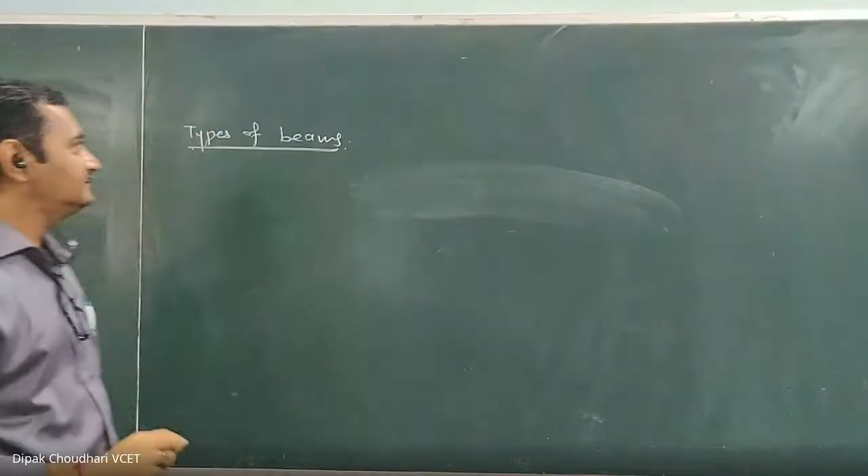Is it visible? Shreyas, unmute yourself and tell me. Okay, yes, it is visible. The first one is the types of beam. Then next important instructions to all of you.

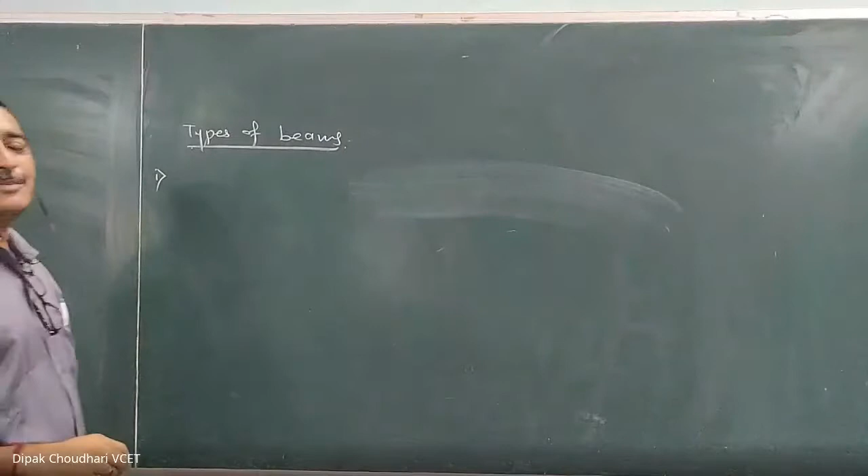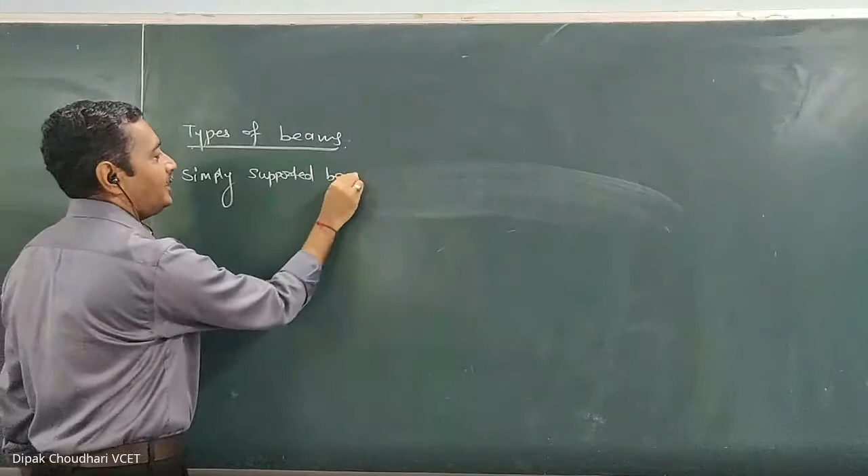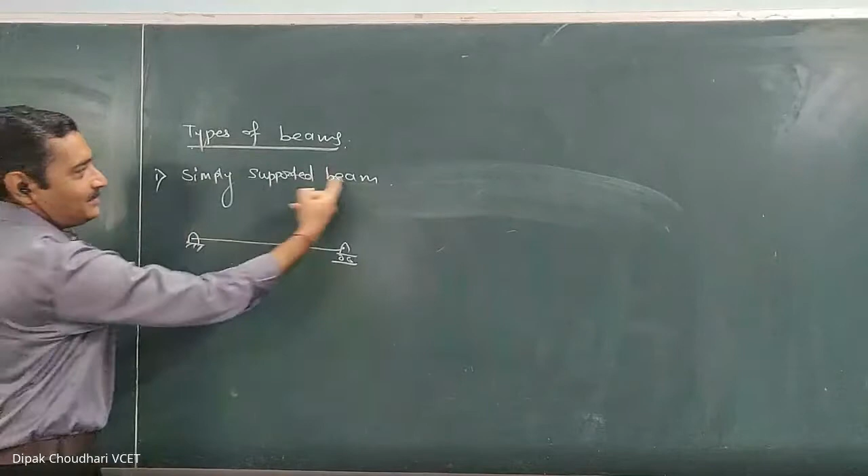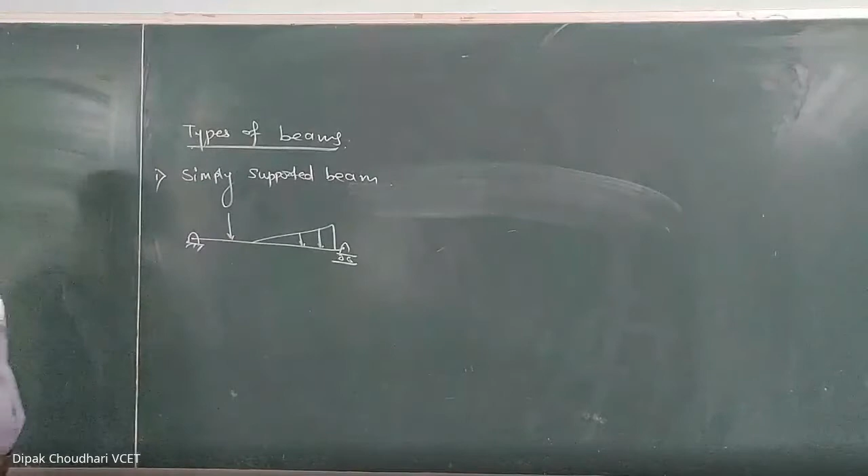Okay, so let's start with the types of beam. You have studied the types of beam in the first year. The first type of beam is the simply supported beam. A simply supported beam is supported at its two extreme ends with different types of supports. So when the beam is supported at its two extreme ends, such type of beam is known as a simply supported beam. The load may be anything, a point load or a UVL, but when the beam is supported at its two extreme ends, it is called a simply supported beam. I hope all of you know how to calculate the support reactions for the simply supported beam.

The second type of beam is the cantilever beam.

Cantilever beam. What is the cantilever beam? If the beam is supported at one end and the other end is free, such type of beam is known as a cantilever beam. And whenever we have the cantilever beam, we have to restrict all three types of motion.

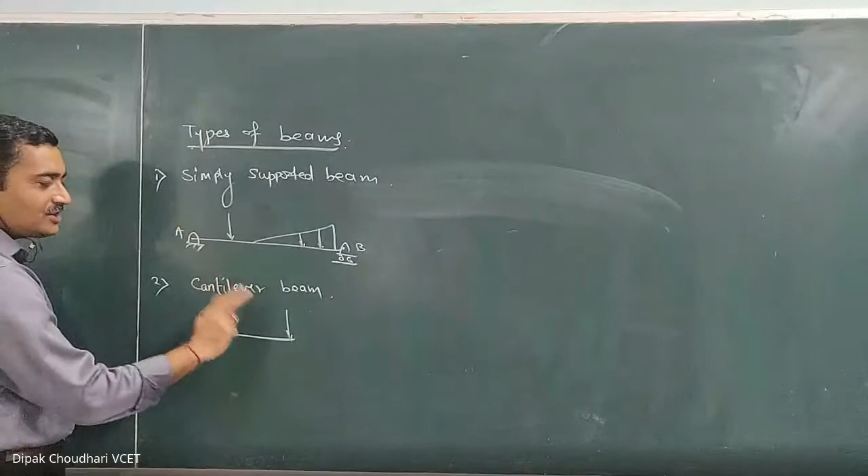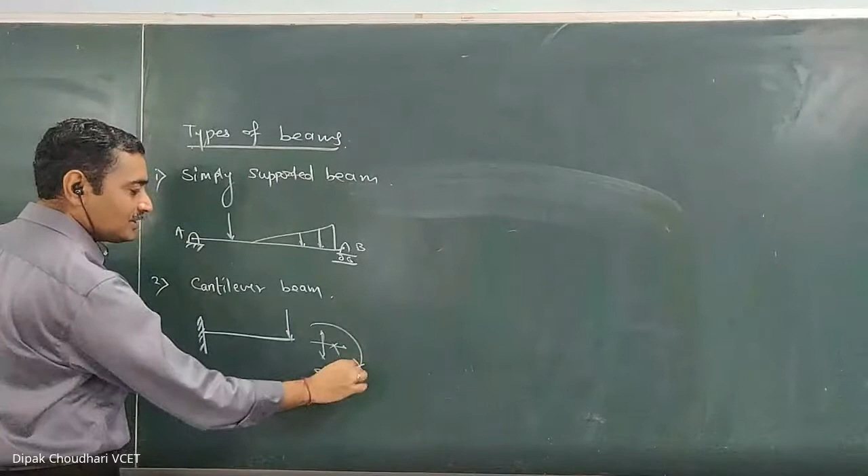There should not be any vertical linear motion, there should not be any horizontal linear motion, and we also have to restrict the rotational motion. To restrict all these three types of motion, the support required for the cantilever beam is the fixed support. That's why for a cantilever beam, the support is always a fixed support.

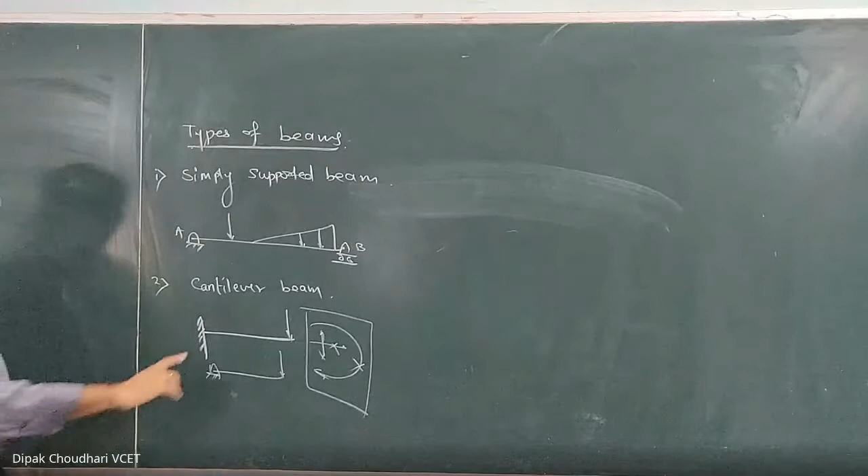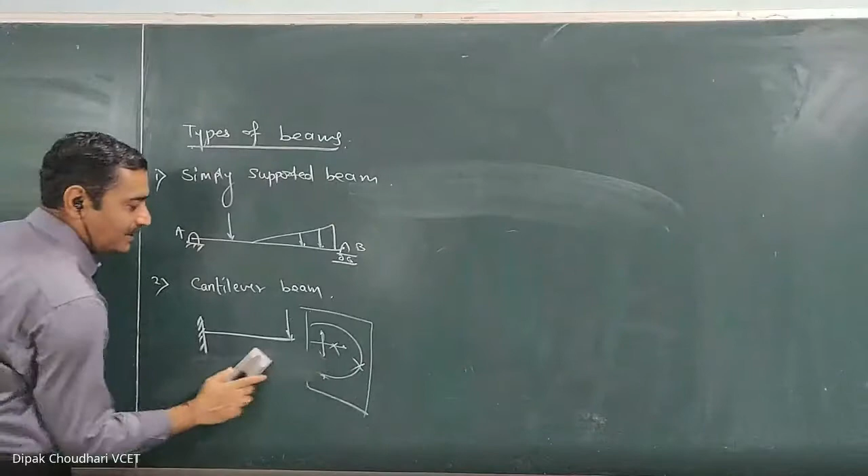In a cantilever beam, if at one end we use a hinge support instead and apply the load, the significance of the hinge support is that it cannot restrict the rotational motion; at the hinge support, rotational motion is allowed. So since rotational motion is allowed, if we use a hinge support instead of a fixed support, it can't remain in equilibrium and will fall down. That's why in a cantilever beam, which is supported at one end with the other end free, the support is always a fixed support.

I'm coming to the types of support also, after covering the types of beam. The third type of beam is the continuous beam.

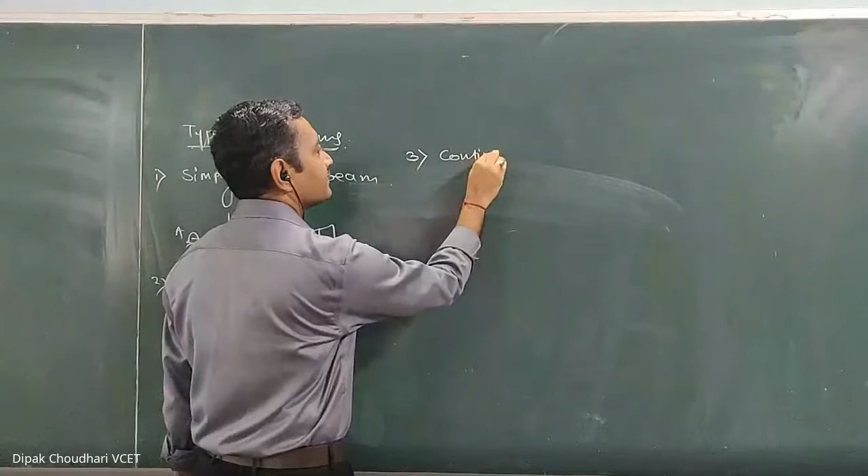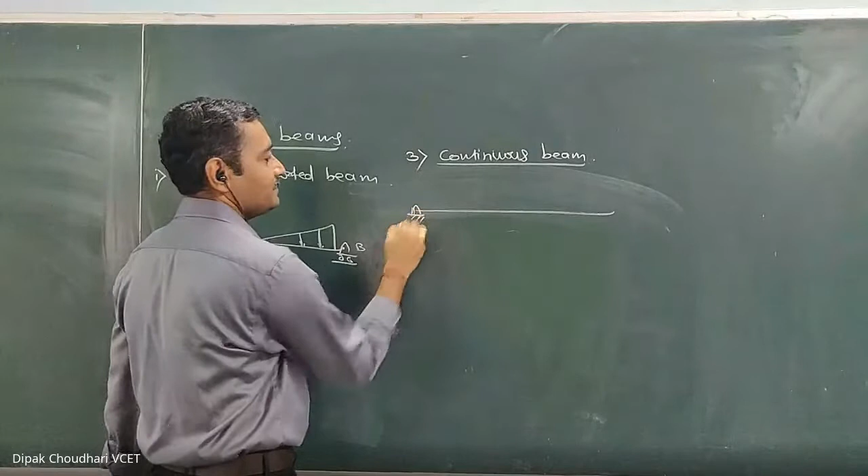Now, what is a continuous beam? When the beam is supported by more than two supports - here suppose this is one support, this is another support, this is a third support - then such a beam is known as a continuous beam.

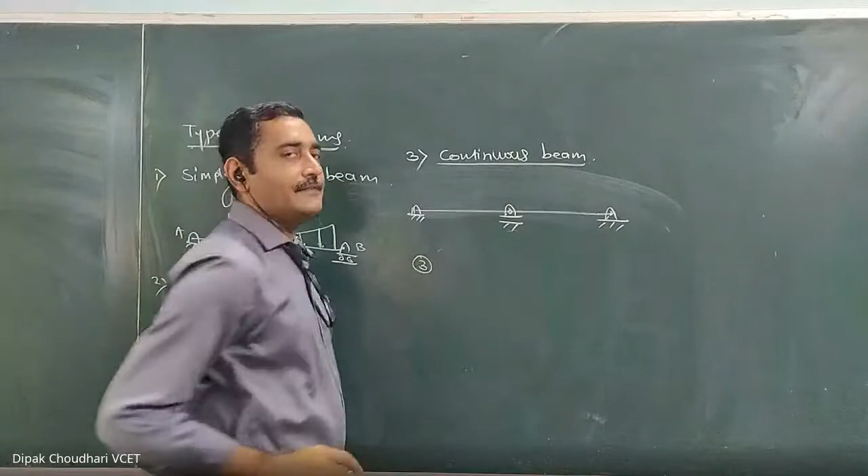We know that when we consider any beam, we consider it to be in equilibrium, and by applying the conditions of equilibrium, we calculate the support reactions. We have only three conditions of equilibrium, and by using these three conditions for any beam or structure in equilibrium, we can get only three equations, and by using three equations, we can calculate only three unknowns.

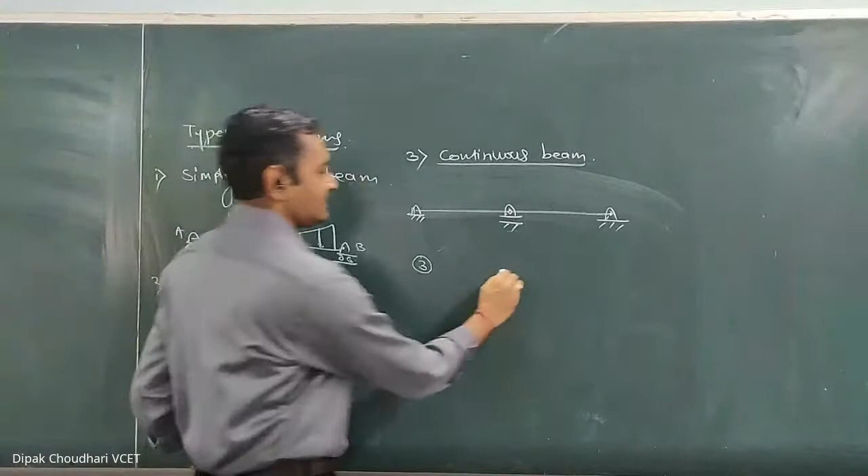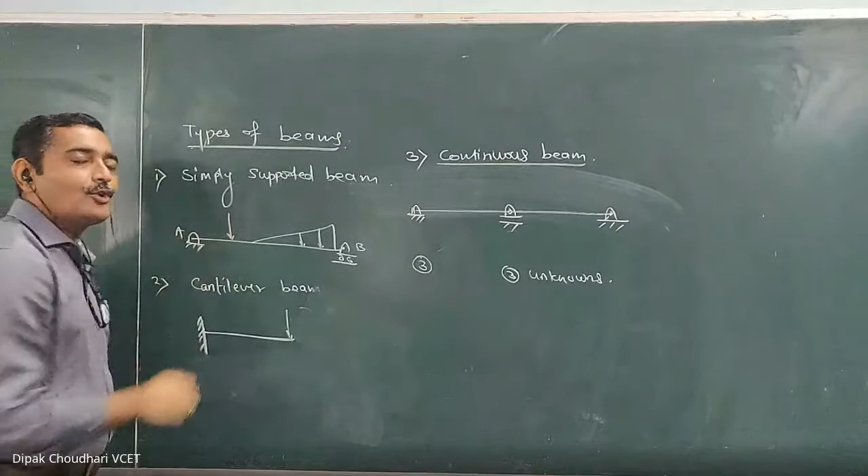Now, consider this simply supported beam. At A there is a hinge support, which has two components of reaction, meaning two unknowns. At the roller support there is only one component of reaction, so only one unknown. Altogether there are three unknowns, and using the three conditions of equilibrium we can calculate them.

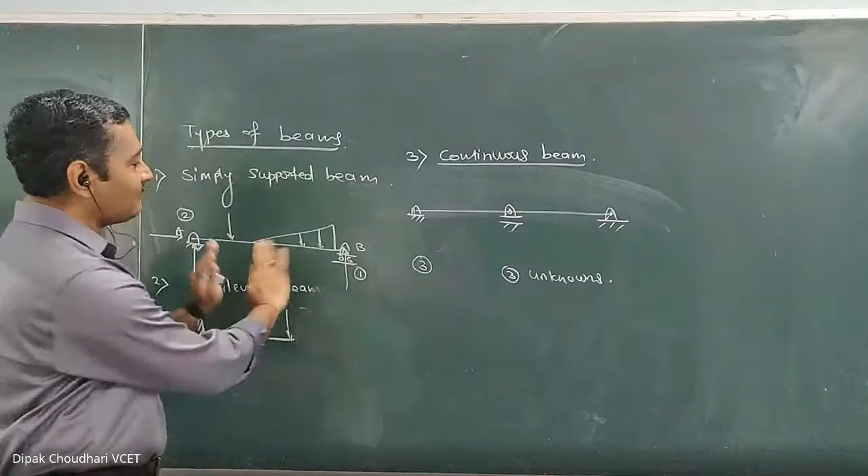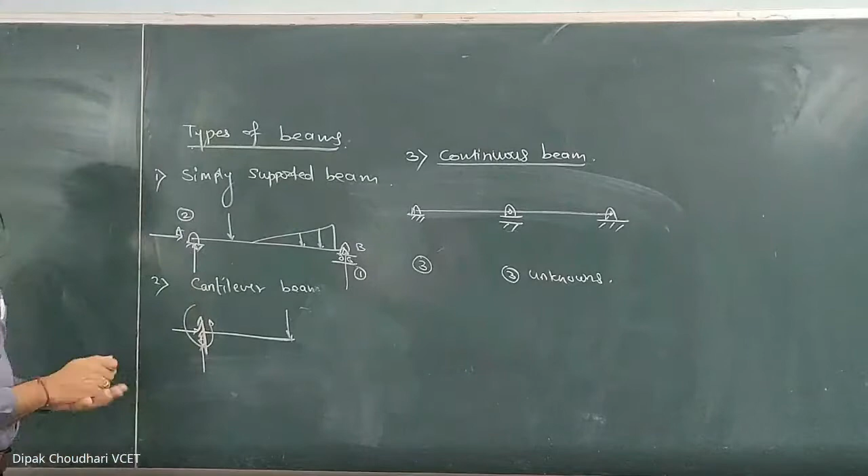Whereas in a cantilever beam there is a fixed support. At the fixed support, horizontal motion, vertical motion, and rotary motion are all restricted. To restrict horizontal motion there's a horizontal component of reactive force, to restrict vertical motion there's a vertical component of reactive force, and to restrict rotational motion there's a reactive moment. So at the fixed support there are three unknowns, and for the cantilever beam, using the three conditions of equilibrium, we can calculate all three unknowns.

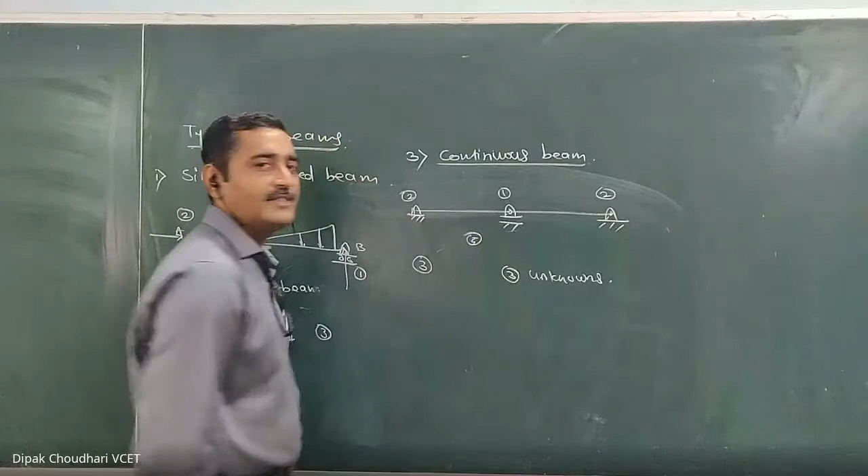But in a continuous beam, since there are more than two supports - suppose this is a hinge, this is a roller, and this is also a hinge - here there are two unknowns, here one unknown, and here again two unknowns. Altogether there are five unknowns, and to calculate five unknowns we require five equations. So how can we get the five equations?

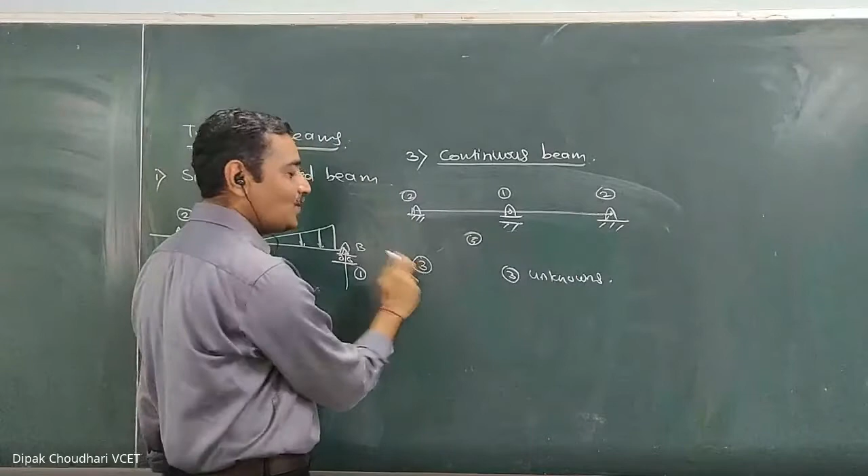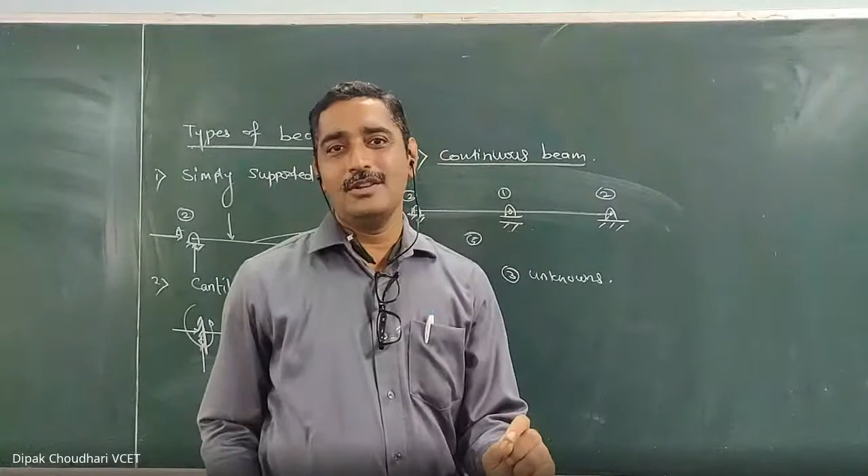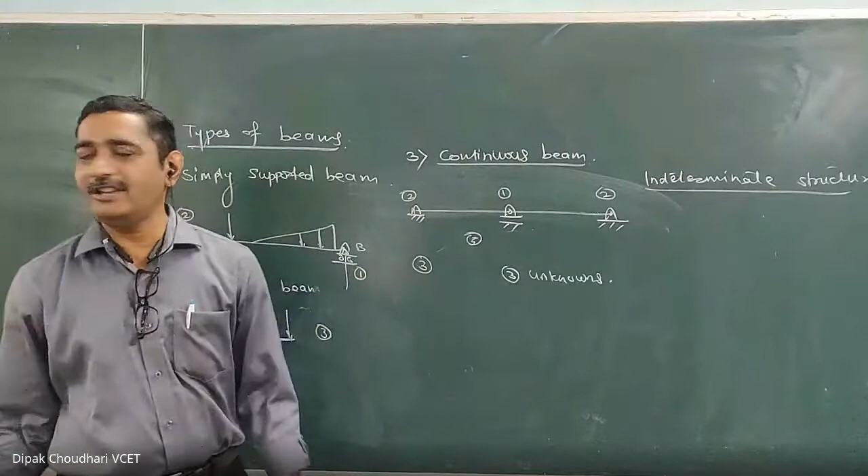Remember, when the number of unknowns is more than the number of equations in a structure - in other words, when the support reactions cannot be calculated using only the conditions of equilibrium - then such a structure is known as an indeterminate structure.

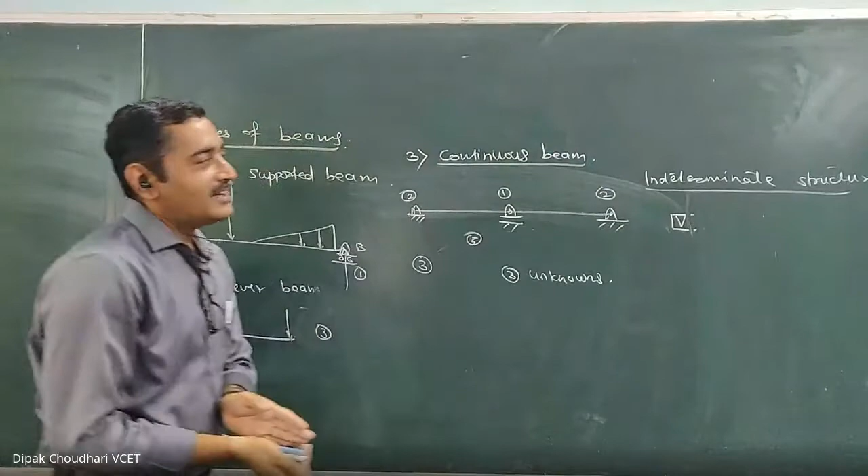But let me tell you, indeterminate structures are not in your syllabus. You have to study only determinate structures, in which support reactions can be calculated using only the conditions of equilibrium. Indeterminate structures will be studied by civil students in the fourth semester, in the structural analysis subject. Till now, in the third semester, you have to learn only determinate structures. So this is all about the types of beams.

Next point is the types of support. All of you know the different types of support and their significance, which you have studied in the first year. The first one is the roller support, second one is the hinge support. At the roller support, there is only one unknown. At the hinge support, there are two unknowns. The third type of support is the fixed support, where there are three unknowns. I'm not going in detail studying the types of support and all these things.

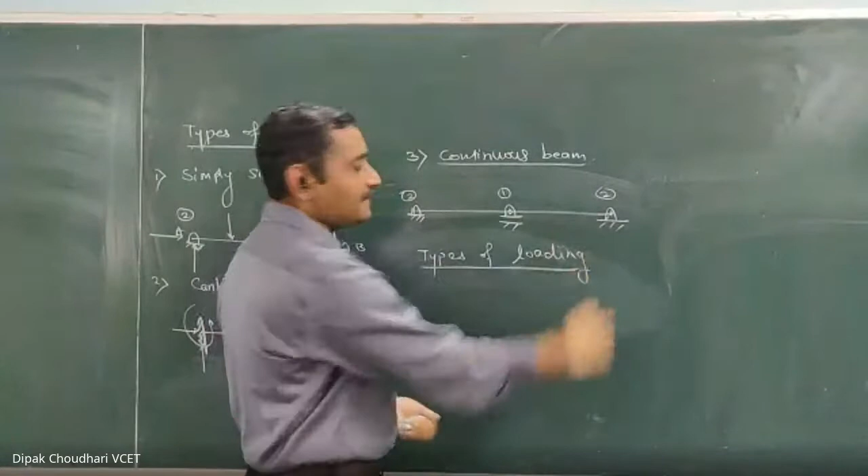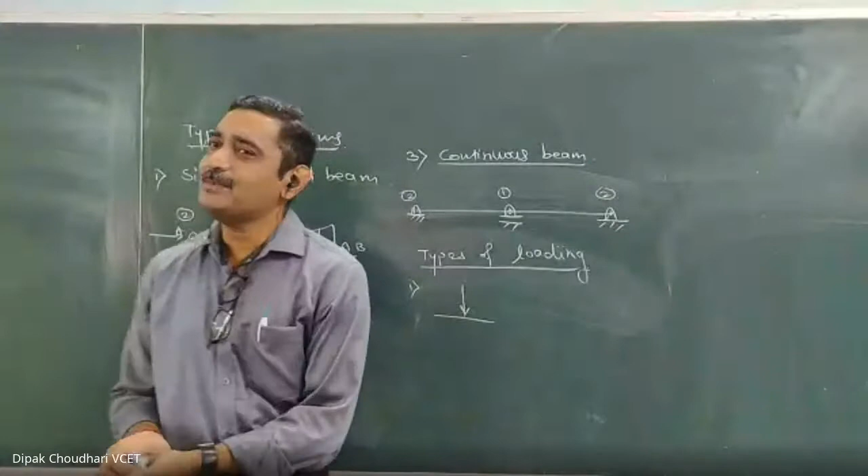Next point is the types of loading. This also you have studied in the first year. The first type of load is the point load, or it is also known as a concentrated load. The effect of the entire load is concentrated at one point, so it is known as a concentrated load. Second one is the UDL, uniformly distributed load.

Let the intensity of the UDL be W kilonewton per meter, spread over a length of L meter. It is a uniformly distributed load. The name itself indicates that the distribution is uniform, that's why it is known as a uniformly distributed load. If you take this 1 meter length, or the next 1 meter length, the distribution is uniform. On this 1 meter, if the load is 100 kilonewton, on the next 1 meter also the load will be 100 kilonewton only. That's why it is known as a uniformly distributed load.

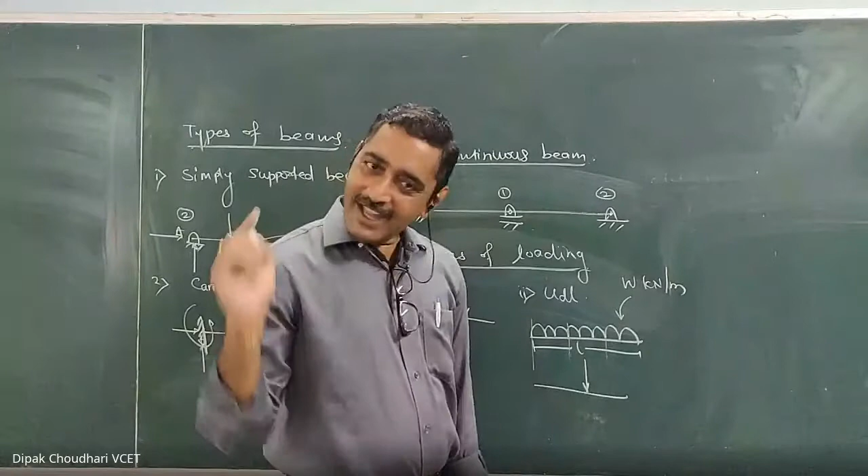The UVL load is expressed by a triangle, so it is also known as a triangular load, or it is also denoted by a trapezium, known as a trapezoidal load. Both are UVL, both are uniformly varying load. This is the uniformly distributed load, here the distribution is uniform. Here the distribution is varying.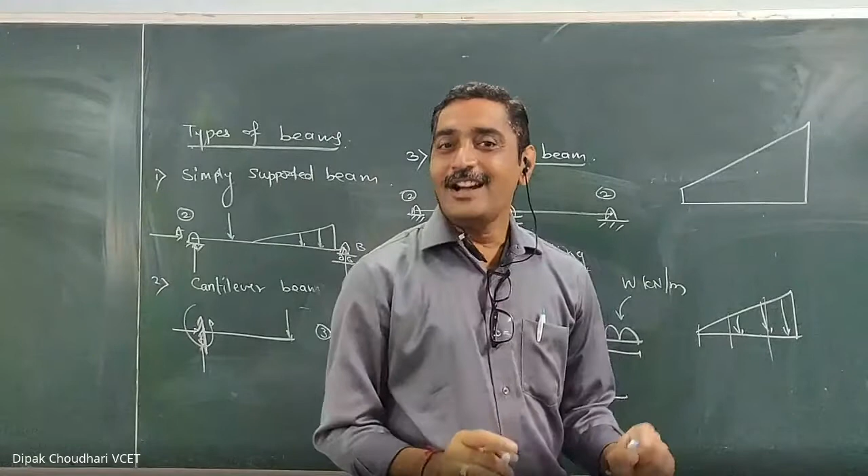Whatever load is there in this one meter, the same load won't be there in the next one meter, so it is a varying load. And that variation is uniform, this linear variation is there. Uniform variation is there, and that's why it is known as a uniformly varying load. This is also uniformly varying load, both are uniformly varying loads.

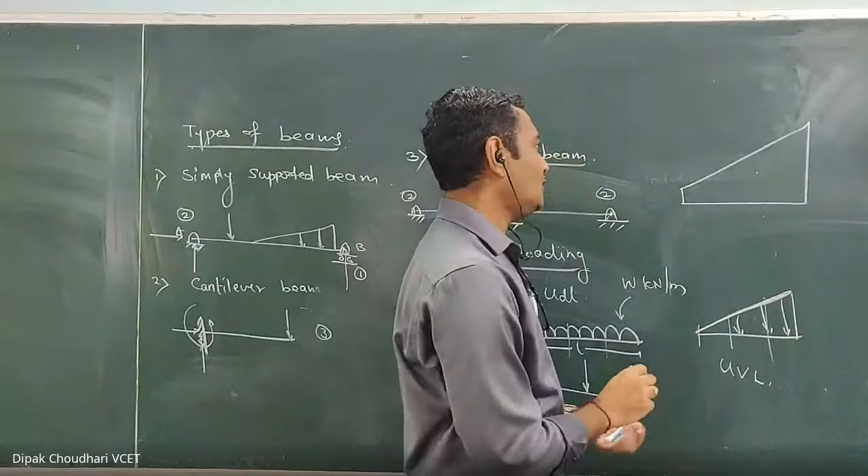The shape of this figure is like a triangle, that's why it is known as a triangular load. The shape of this figure is like a trapezium, that's why it is known as a trapezoidal load. Now, whenever we represent the UVL, whether it is a trapezoidal load or a triangular load, remember the height of this graphical representation of a UVL represents the intensity of the load at that particular position.

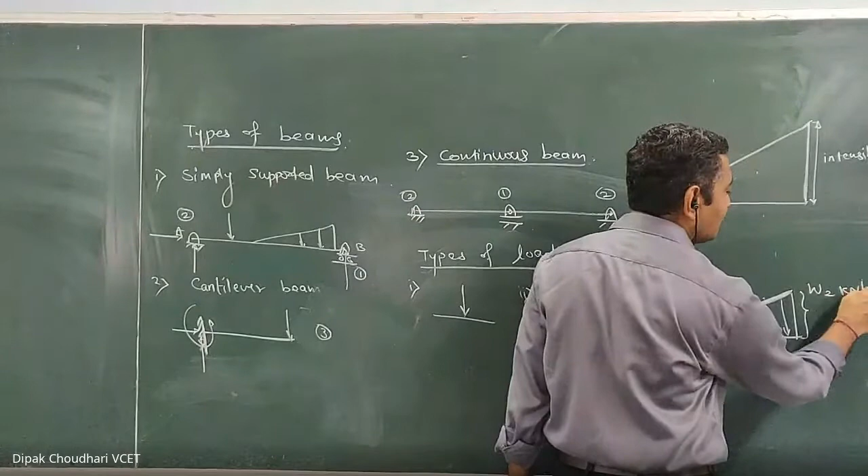Now in UVL, in the triangular load, we can find that here the height is 0, meaning the intensity is 0, and this intensity linearly varies. This height represents the intensity. This intensity linearly varies and becomes maximum over here, and this intensity is, suppose, W2 kilonewton per meter. At this initial starting point, since the intensity is 0, the height is 0, and the shape becomes like a triangle, that's why it is known as a triangular load.

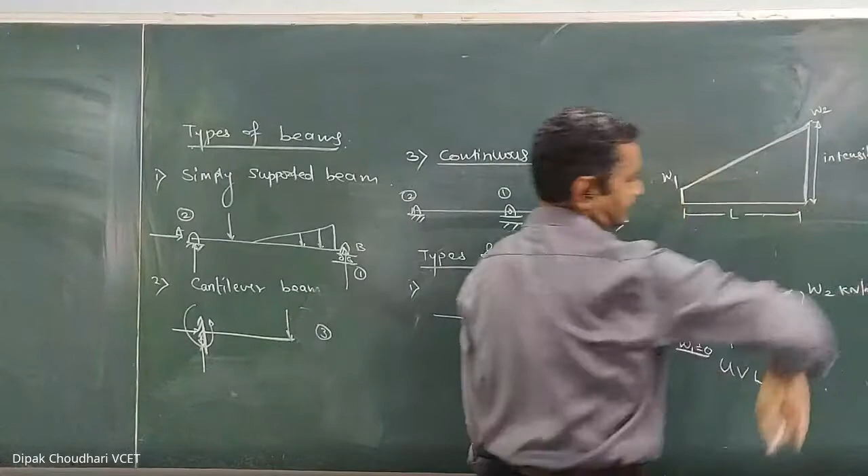Whereas this is also UVL, but at this starting point, the initial intensity is not 0. Here some initial intensity is there, which again linearly varies and becomes W2 after a length of L meter. Both are similar loads, only here W1 is 0, that's why the shape becomes like a triangle. Here there is some initial intensity, and that's why the shape becomes like a trapezium, that's why it is known as a trapezoidal load. Otherwise, both are UVL.

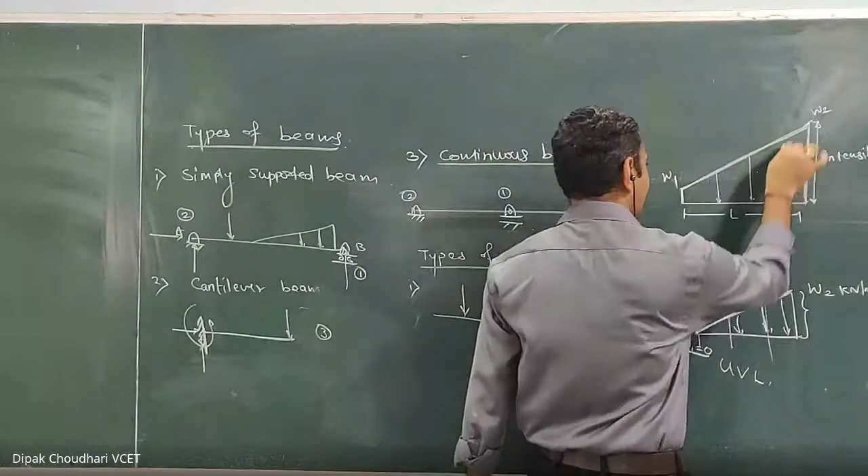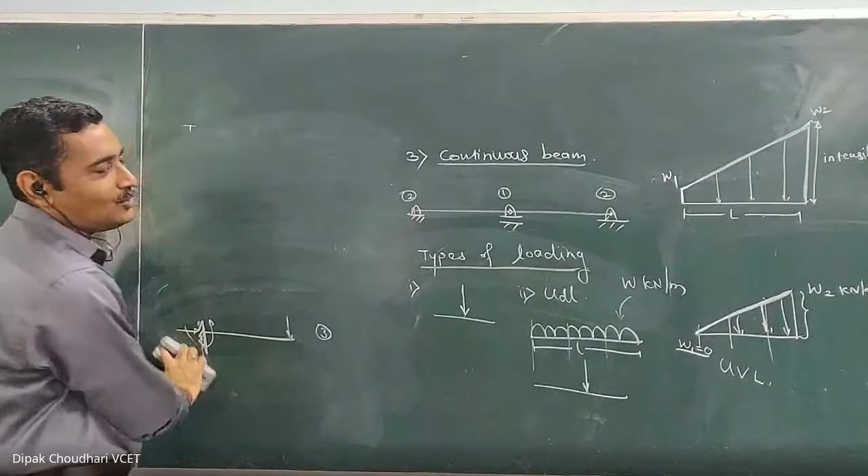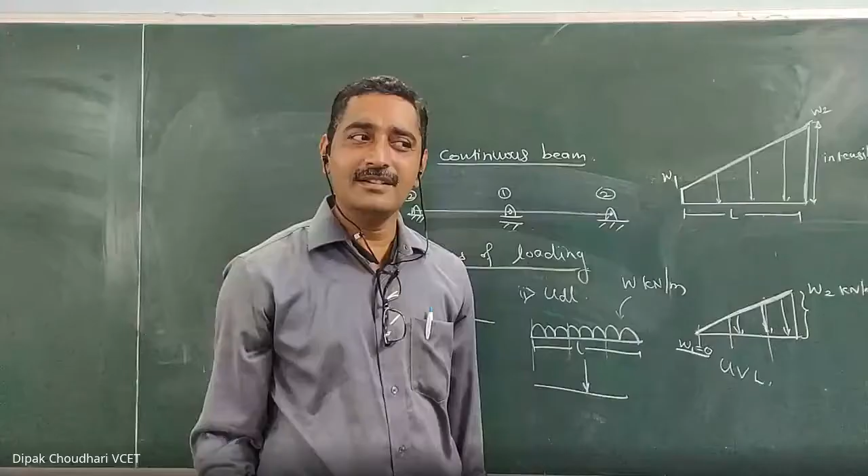Now while solving the problem for calculating support reactions, if there is any problem, please unmute yourself and let me know. Shreyas? Hello? Yes sir. Is it going on properly? Yes, yes. Rehan, is he there? Yes sir, okay. Please unmute yourself and let me know if something is going out of camera, or if this part is not visible. Can you all see the intensity written here? Okay fine, yes sir.

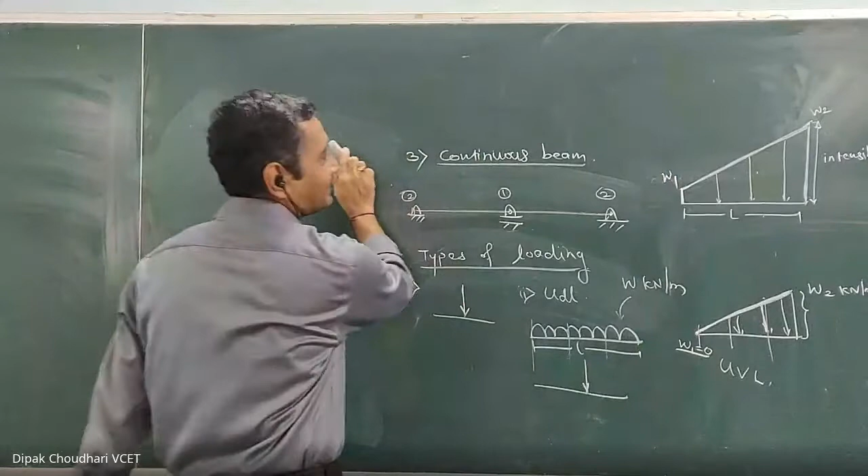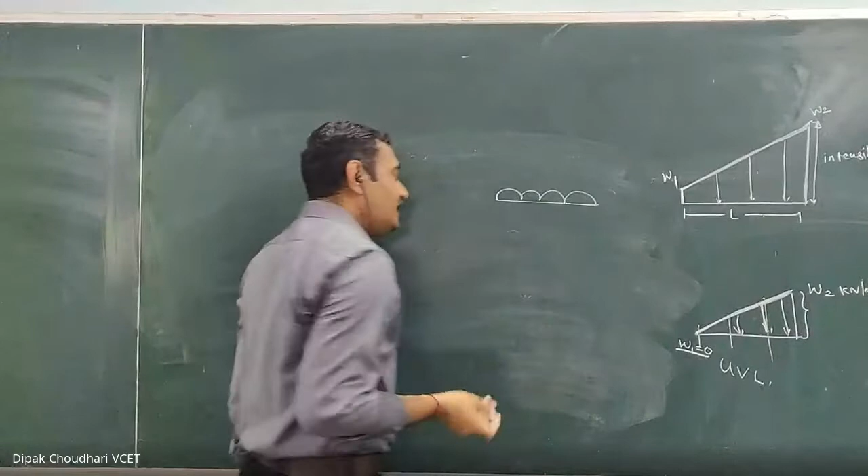Now, all of you know how to convert this UDL and UVL into an equivalent point load. In first year, while calculating the support reaction, the first step we used to draw the free body diagram, and in that free body diagram we used to convert this UDL and UVL into an equivalent point load. Do you remember that? Definitely, you must have remembered.

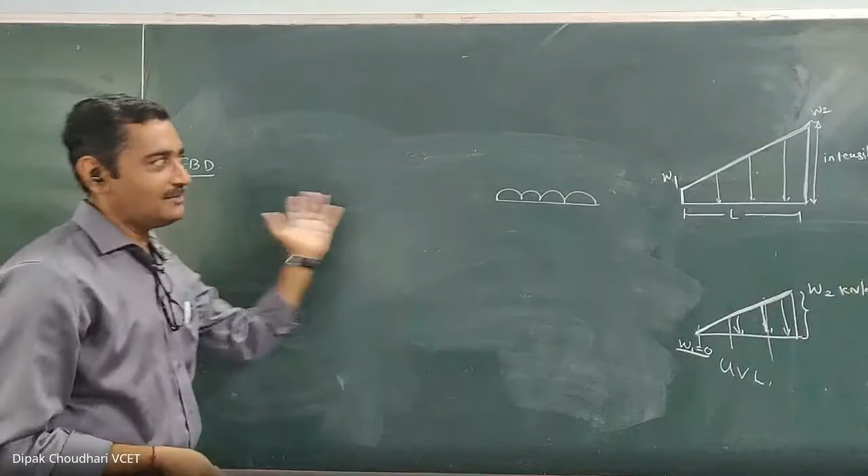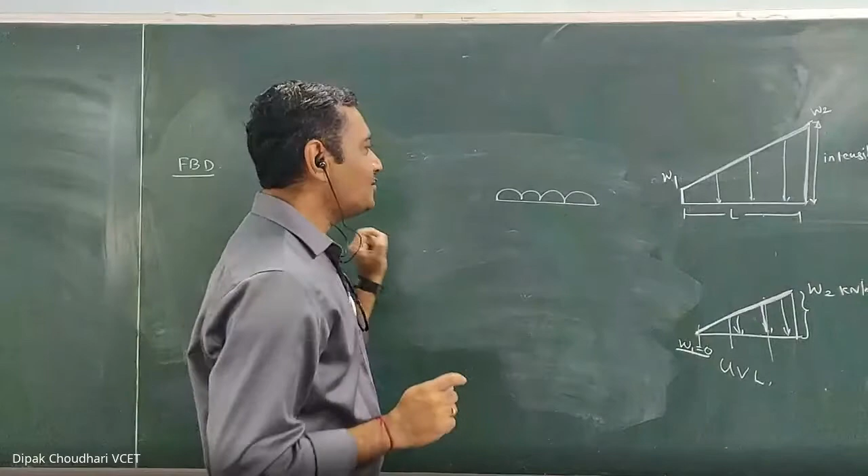In FBD, while drawing the FBD, we used to convert this UDL and UVL into an equivalent point load. Same procedure we have to follow this year also to calculate the support reaction. Only the thing is, I will suggest, don't do it physically. You have to assume it in the similar way, but don't do it physically.

For example, I will consider one simple example. Let's consider this simply supported beam. Here there is a hinge support. Here there is a roller support. A, B, this is the point load. Then this is the UDL, 3 meter. Then this is the UVL on 4 meter. Let this distance is 1 meter.

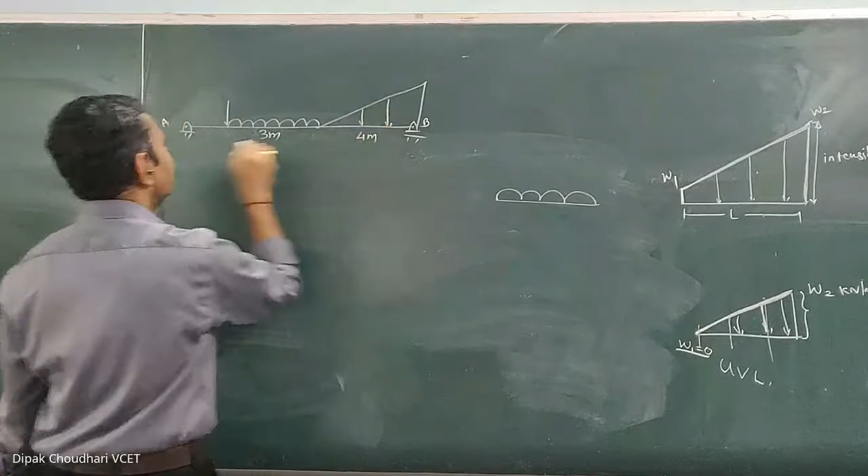Let this is 10 kilonewton, 15 kilonewton per meter. And let this maximum intensity is 20 kilonewton per meter. Okay. For this beam, I have to calculate the support reaction.

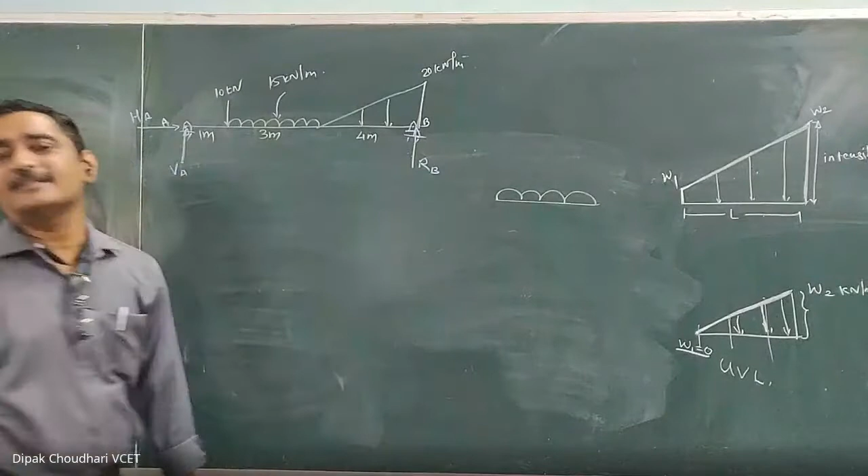Now at point A, there are two components of reactive forces. Since this is a hinge support, let this is HA and this is VA. At point B, there is a roller, so only one unknown, and that is RB. Here I have written HA and VA. Here I have not written VB because here HB is 0. Since HB is 0, this VB itself becomes the resultant reaction at B.

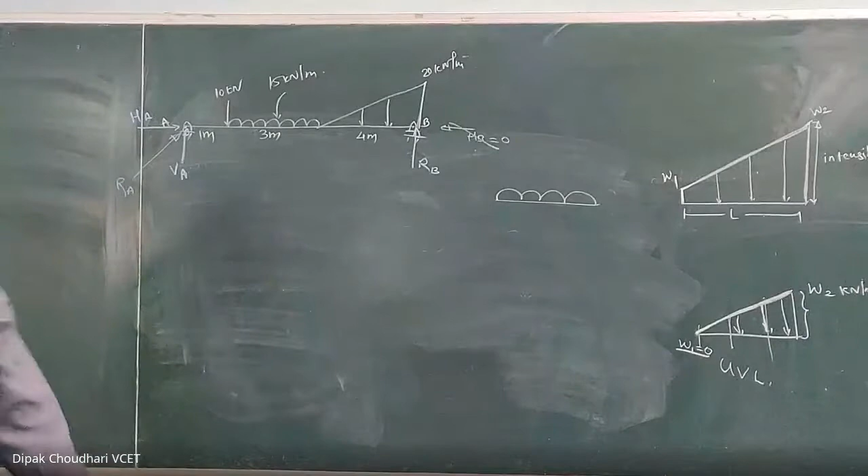VA is the vertical component, HA is the horizontal component, and if I calculate the resultant of these two components, this becomes the resultant reactive force at point A. Okay, but it is not required. In first year we used to calculate that resultant reaction also.

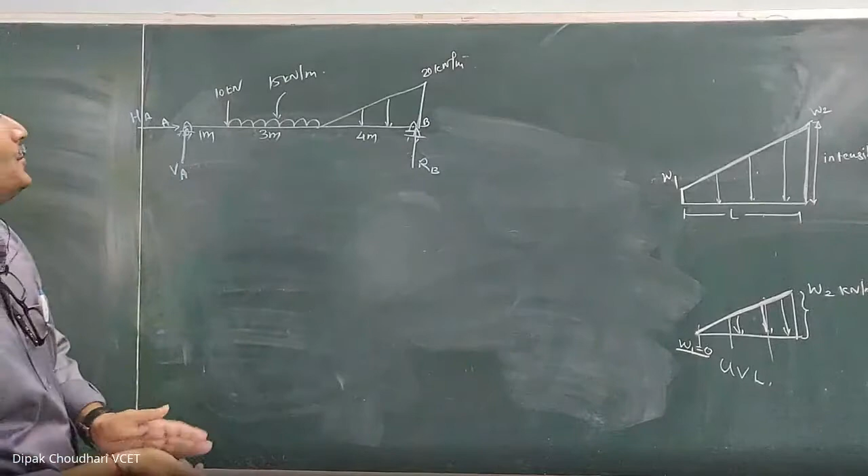Now what I want to tell you, from now onwards, while calculating the support reactions, we have to assume or think that this UDL and UVL, you have to convert it into equivalent point load, but not physically. No need to draw a separate figure and show its equivalent point load. Everything you have to do mentally, and you have to directly write down the calculations. Okay, I'm going to do that calculation here.

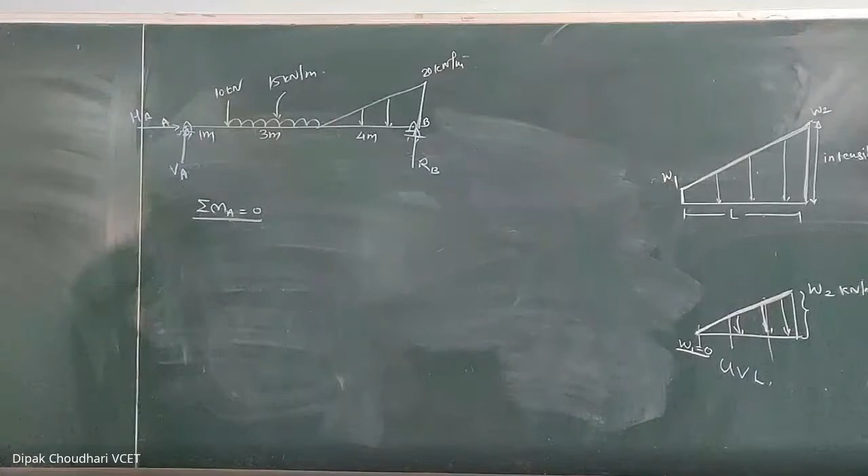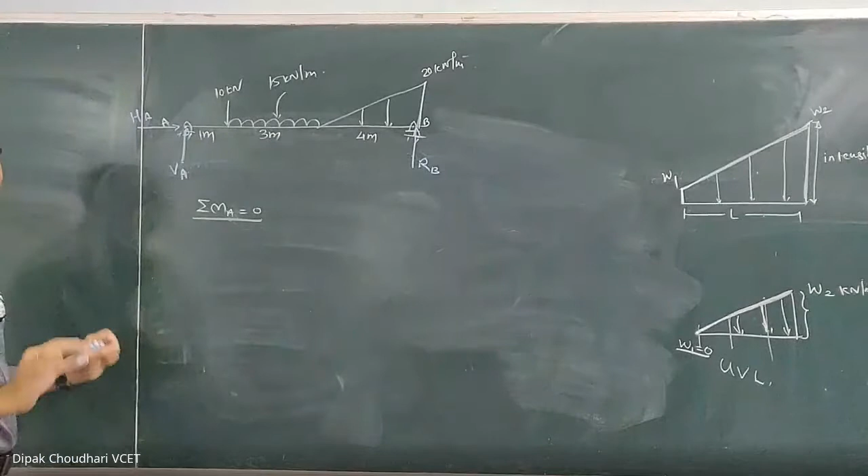Now to calculate the support reactions, first I'm going to use the moment equation using the condition of equilibrium. So first I'm going to use the algebraic summation of the moment of all forces about point A. This is the first condition of equilibrium which I'm going to use. If I take the moment at point A, the moment of HA about point A will be 0. Moment of VA about point A will be 0 because both are passing through A, so their perpendicular distance from A will be 0. We are taking the moment about point A, so we have to take the perpendicular distance from A. Both perpendicular distances become 0, that's why the moment of both HA and VA will be 0.

Moment of this 10 kilonewton force about point A is clockwise. Let's consider anti-clockwise positive, so this clockwise is negative. So minus 10 into 1.

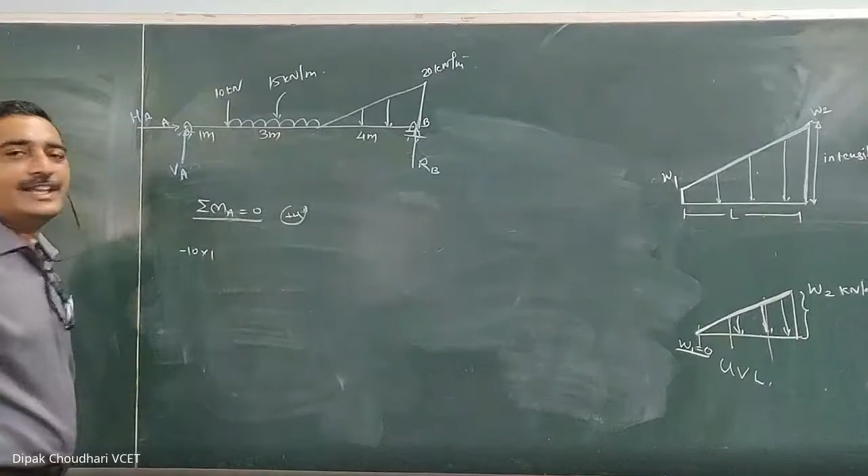Now for taking the moment of this UDL, don't convert it to equivalent point load physically. Because in second semester, in strength of materials, we don't have to just calculate support reaction. We have to draw the shear force and bending moment diagram. If you convert this UDL and UVL into equivalent point load, and if you draw the shear force and bending moment diagram, the nature of the shear force and bending moment diagram will be totally different.

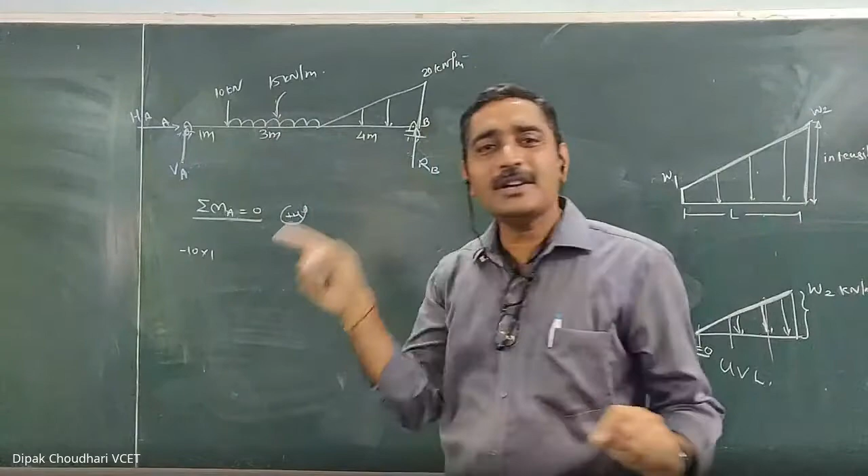For UDL, the shear force diagram is an inclined straight line, whereas bending moment diagram is a parabola. For UVL, shear force diagram is a parabola and bending moment diagram will be a cubic curve. But if you convert it into equivalent point load, the nature of those diagrams will be different. That's why what I'm suggesting from the beginning, you do the practice so that you can calculate the support reactions and do the calculations directly, assuming it as UDL and UVL, without converting them into an equivalent point load. Let's see how.

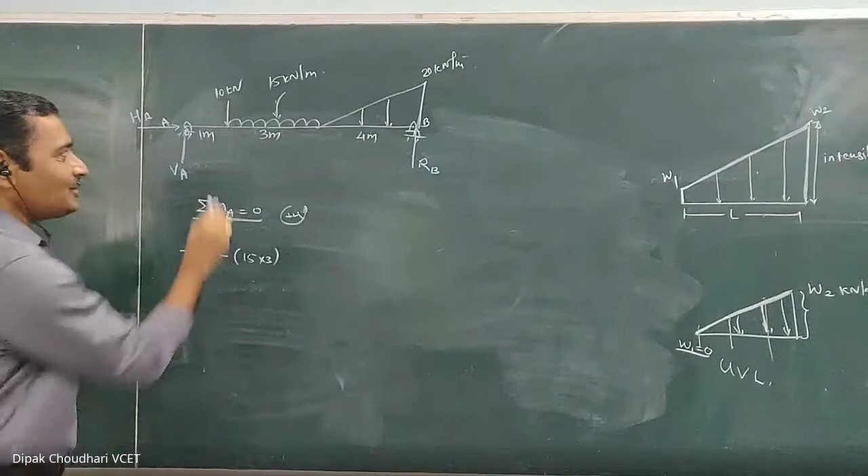So the moment of this HA and VA about point A will be 0, moment of this 10 is clockwise, so minus 10 into 1, moment of this UDL is also clockwise, so minus. Now I'm mentally converting it into an equivalent point load. So 15 into 3, here I'm writing 15 into the bracket. This bracket represents the equivalent point load for this UDL. And we know that the equivalent point load for the UDL acts at its midpoint, multiplied by that perpendicular distance. So in another bracket I'm writing 1 plus 3 by 2.

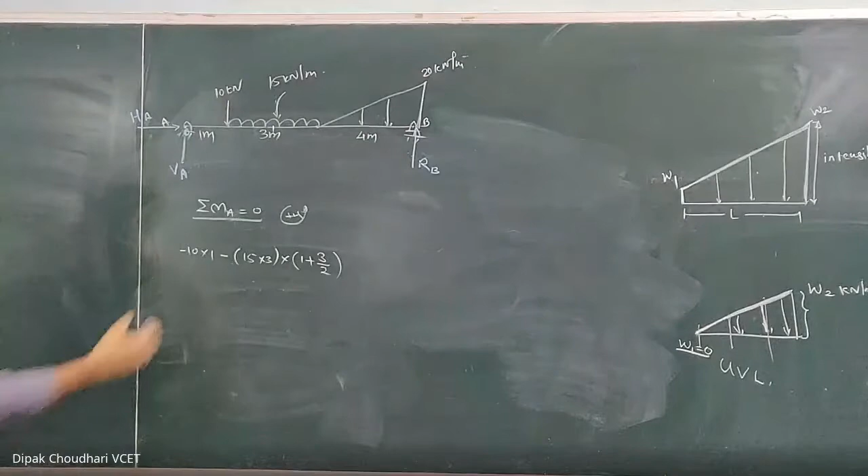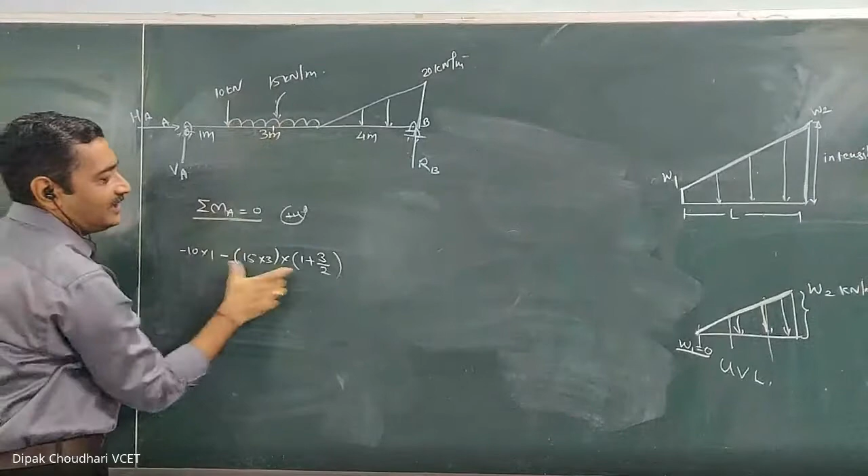So this is the equivalent point load for the UDL and this is the perpendicular distance of that equivalent point load from A. Without converting that UDL into an equivalent point load, we can write it directly in this way. Even after practice, you can directly write it as 45 into 1 plus 1.5, 2.5. Not an issue.

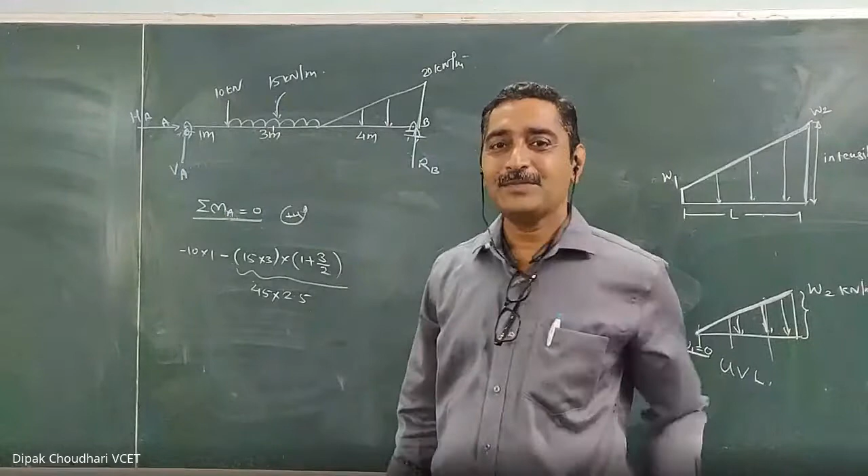In first year, you used to get 8 marks to calculate the support reactions. In second year, you will get only 1 mark. But if support reactions are correct, your further sums will be correct. If wrong, your entire sum will be wrong. Remember, these SFD BMD sums normally carry 10 to 12 marks.

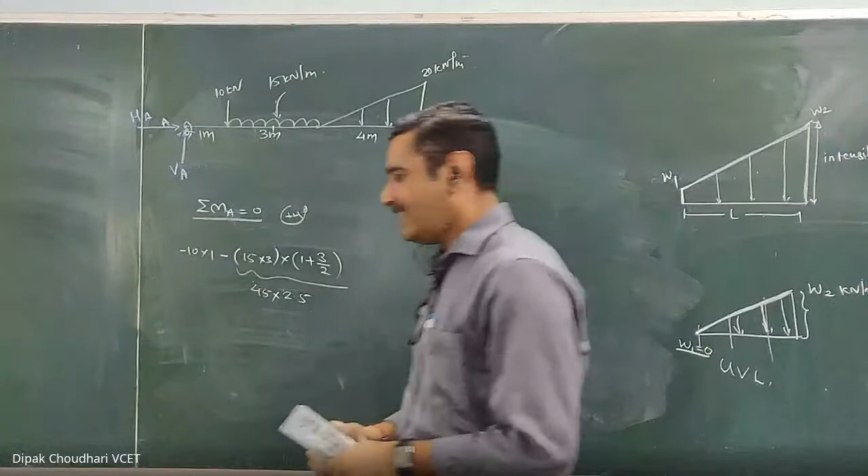Very simple. So this is the moment of this UDL. Now next is the moment of this UVL, which is also acting downward.

Since it creates a clockwise moment about A, it's minus according to our sign convention, into the equivalent point load for this UVL, which is half into base into height. This is the magnitude of the equivalent point load into perpendicular distance. This equivalent point load acts at the centroid of the triangle.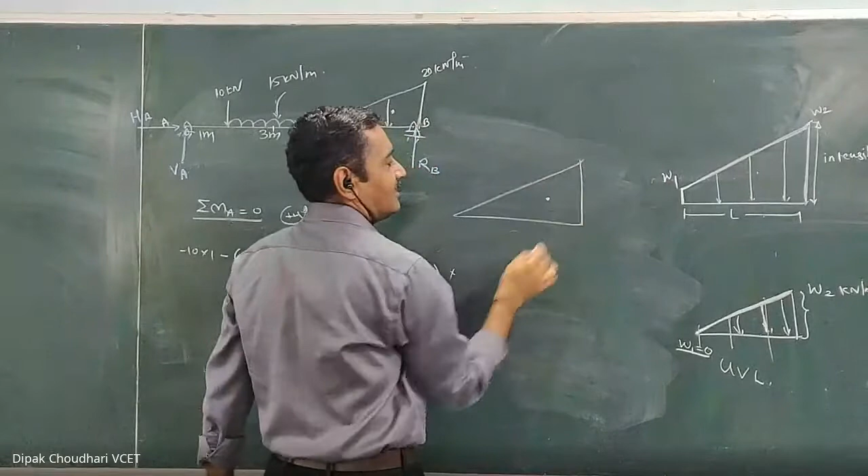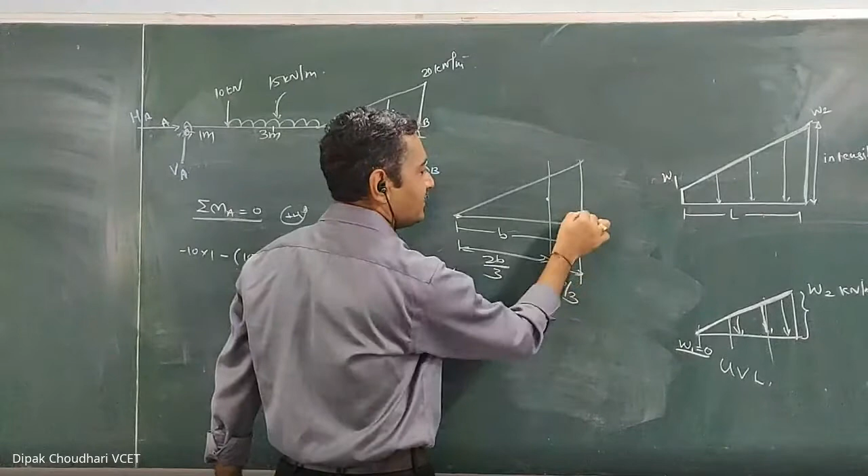We know that for a triangle with base b, the centroid is at a distance of 2b by 3 from the vertex, and b by 3 from the base, or you can say b by 3 from the right angle corner. So this equivalent point load for the triangular load acts at the centroid of that triangle.

So the distance of that equivalent point load from A, writing it in another bracket, is 4 plus this distance. How much is that? It is 2b by 3, that is 2 into 4 by 3.

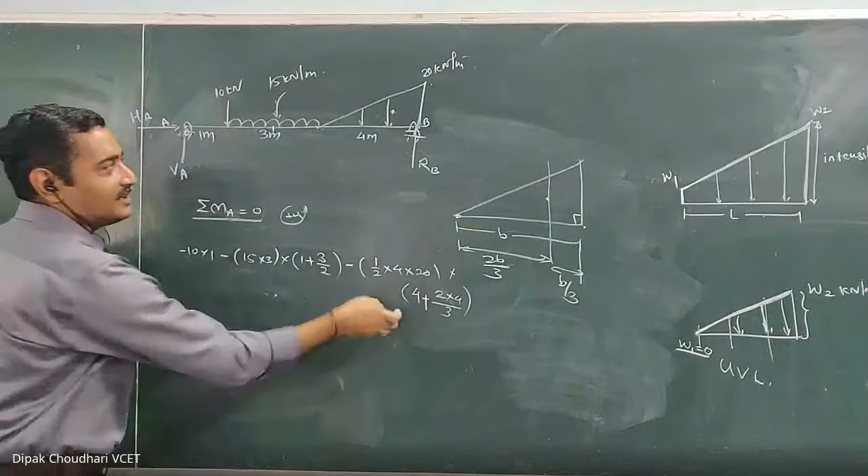Hope all of you understood this. This is the equivalent point load for the UVL, and this is the distance of that equivalent point load from A, which is 4, and this distance is 2b by 3, that is 2 into 4 by 3.

So I suggest you practice calculating it directly, mentally calculate and directly write it down. So this is the moment of this equivalent point load.

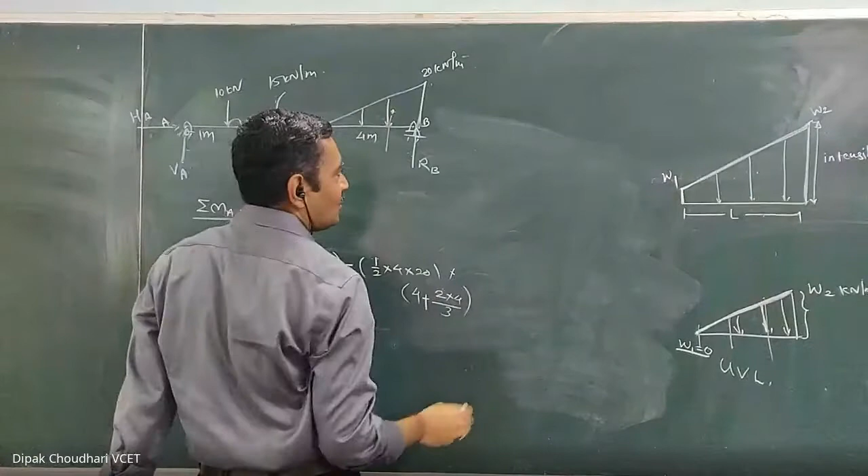Then moment of this RB: it produces an anti-clockwise moment about A, so it's plus according to our sign convention. It is the force RB into perpendicular distance from A, 4 plus 4 is 8, which is equal to 0. Simplify this, you will get RB.

Hope all of you are comfortable with this calculation. Then use another condition, summation of Fx equal to 0. If I use this condition, I will get HA equal to 0. Then use summation of Fy equal to 0.

If I apply summation of Fy equal to 0, then VA minus 10 minus 15, 3s are 45, minus this calculation 20 into 4, 80 by 2, it is 40, plus RB, which we have already calculated, equal to 0. Complete the equation and calculate VA.

In this way you can calculate VA. What I want to tell you is, all of you know this procedure of converting UDL and UVL into an equivalent point load and doing this calculation. But what I am suggesting now in second year is, instead of converting it into an equivalent point load, directly practice doing this calculation.

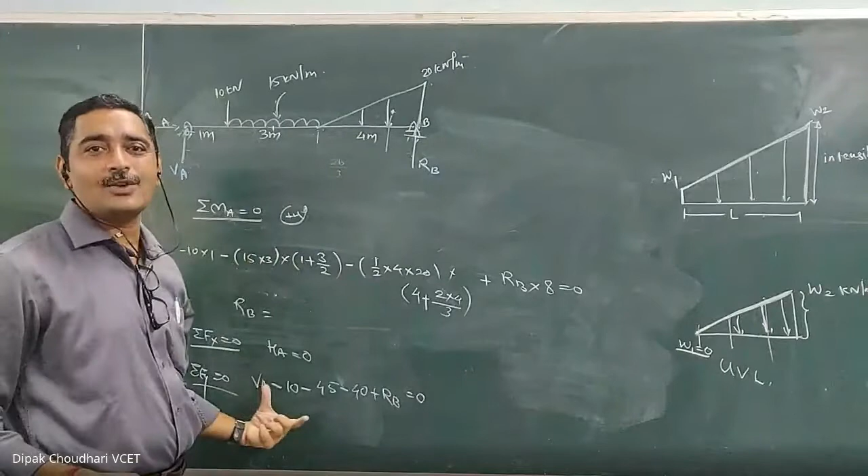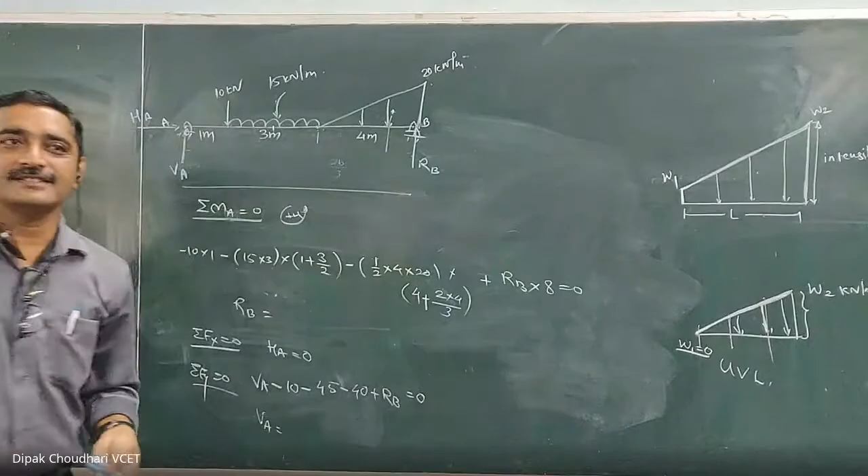Do it the same way, but do it mentally, not physically. Don't actually draw it. Is that clear, Shreyas? Yes sir, it is clear. What time is it now?